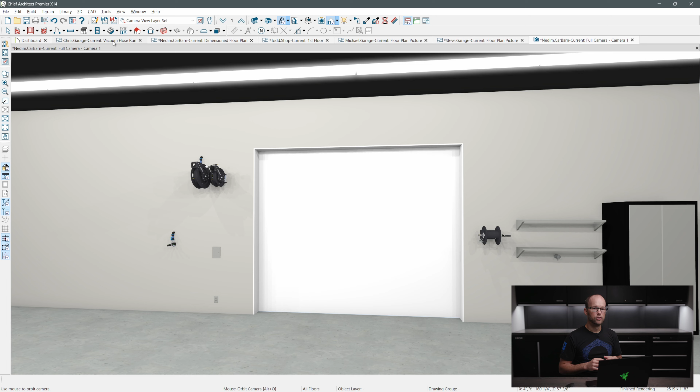So the first garage I'm going to show you is our client Chris. As you can see here, he's got a pretty large space, but we're really going with a pretty simple setup. Let me show you a 3D view here real quick to give you some idea and context.

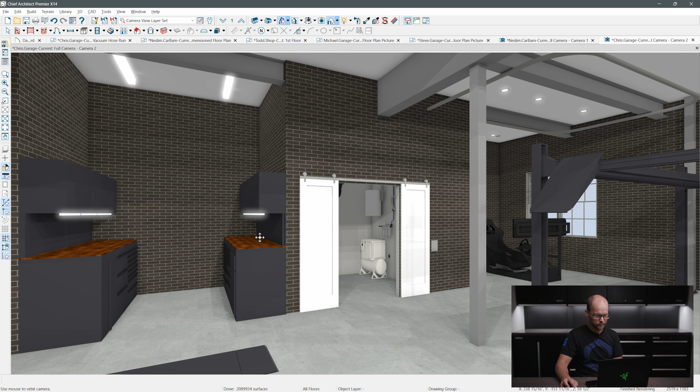We got some errors here, it's all right. We've got this room over here that is kind of like the mechanical room. We've got the Kränzle in there, we've got a FIAC New Silver 3/100 compressor, a sink, and some hose reels and stuff.

He really wanted to hide as much of the mechanical stuff behind the wall as possible, which of course means, hey, let's put the vacuum in there as well. He didn't want to do a hose reel for the vacuum though, since it was going to be hidden in that wall, and it's only 50 feet, so that constricts you a little on how far you can bring it out if he's got a car on the other side, plus it's more difficult pulling that size of hose through the doorway.

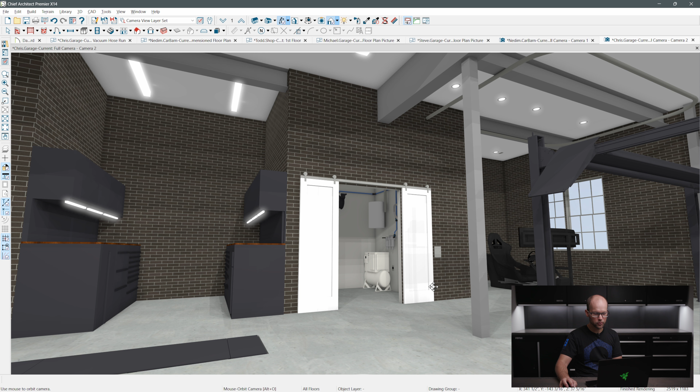So we wanted to do a really clean install with hide-a-hose. What we've done here is plan out the vacuum to be on this wall above the compressor. Power is up here on the left, and that can really be anywhere, but ideally I'd probably want to put the power just below over here, which you'll see in all of our other designs too, that the power is typically on the left bottom.

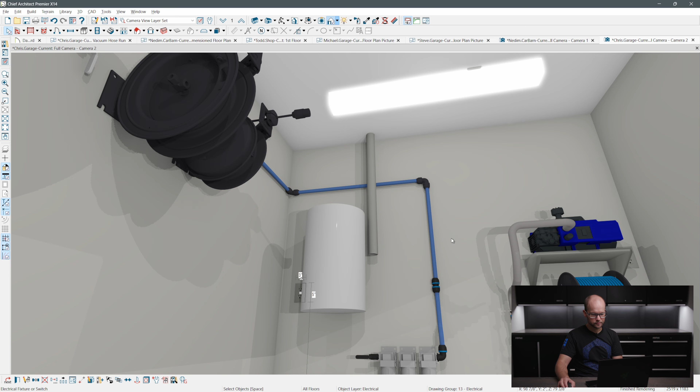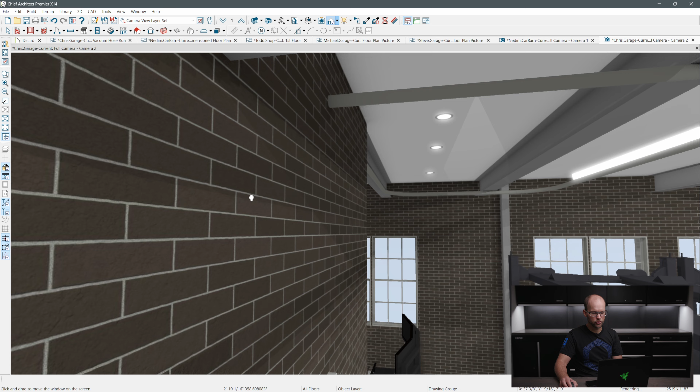We've got the piping that goes up into the ceiling, and there's a really nice long sweeping 90. For any of you doing a hide-a-hose situation like this, you want to do a long sweeping 90 anywhere you've got a turn. You can see where this comes up into the ceiling, there's an attic space here we haven't modeled out, and then it comes over into the main structure of the building. Because of the floor above and the I-beams, there really wasn't a good place to hide all of this piping to house that 50 feet of hose.

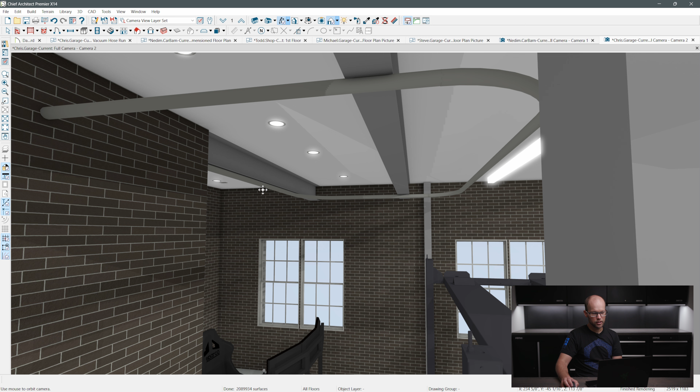He decided it would be best to just have it exposed. Now at the time of install they may do it a little differently than this, that's fine, but we at least planned out how much piping they're going to need, how many 90s they're going to need, and all of that. So you can see it come out this way, go just below the I-beams, and circle back into the wall here, with another 90 that comes down off of this to bring the piping down to this access panel.

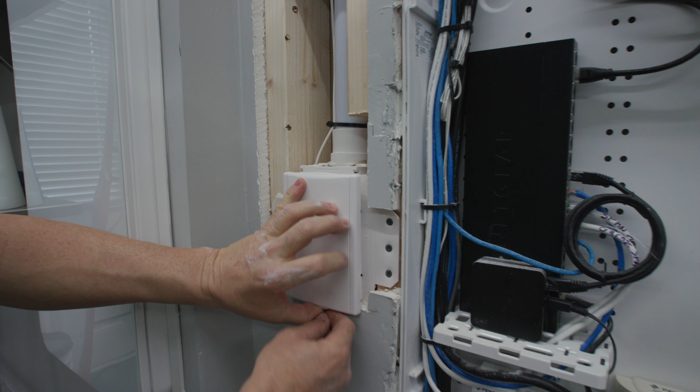So right next to the door is where we have this access panel, and this is going to work out to be a nice location for him. If you guys have never experienced the hide-a-hose function, it's incredible. It's so cool to be able to pull the hose out, lock it into place, turn on the machine right from that switch, and then when you're done, unlock it, plug the end of that hose, and it just sucks back up into the wall. It's the coolest thing. So this is Chris's setup.

It's pretty simple, but basically we're just planning out where this piping is going to go up, where it's going to 90 over, and then how it's going to make this loop. You have to figure out, based on where your vacuum is and where your outlet or access panel is, how to fit over 50 feet of pipe so that you can house the hose that goes in that.

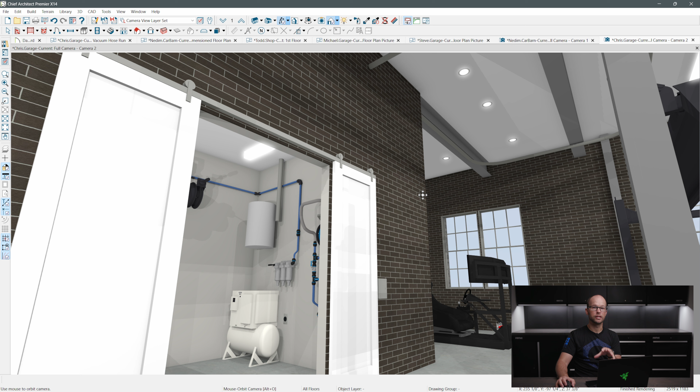So if you have your vacuum very close to the access point, you're going to have to go out and around, past all the piping, and then bring it back. That's what we did with Chris here, figuring out the piping situation around the ceiling and stuff. And like I said, at game time install, he may want to do it a little differently and maybe hide it more back in that corner, but we've at least figured out all the pieces and parts he needs, and given him an idea of what it could look like.

All right, next we're going to jump into Nedim's garage, and this is another hidden kind of install where we're doing hide-a-hose. However, this one's a little different in that we have multiple access points for the hide-a-hose install.

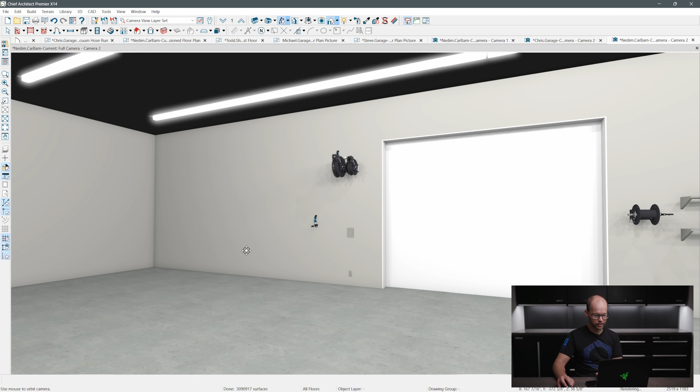So for Nedim, in this main large space where he's going to have some car lifts and a working area and be able to do some washing and stuff like that, we set up this kind of air station over here. This air on the wall is going to be for a future lift that he's going to install. So this made a really good, near-the-entrance but secluded type of location for the vacuum, or for one of the access panels.

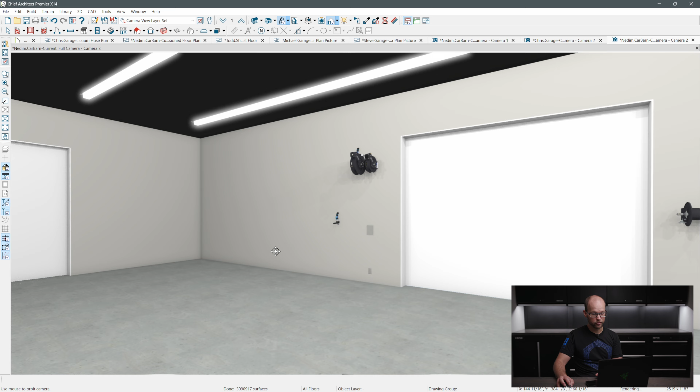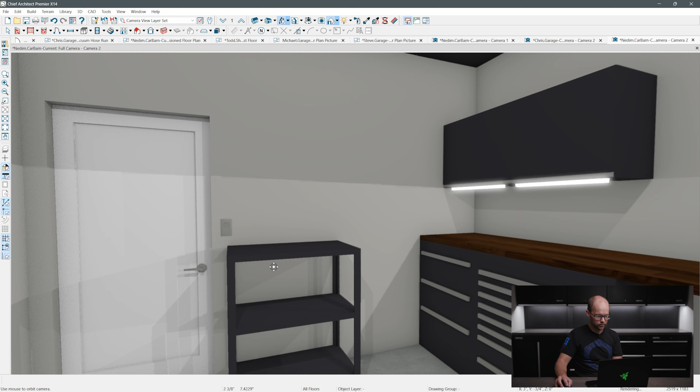Let's see, I know he's got some more in here. Yeah, we've got another one over on this side near the working lift, the recessed scissor lift. And then I believe over in this space here where we have the hidden cabinets, we've got another access panel. Yes, on this wall here, so that way he can vacuum in this room or clean up any parts or anything like that.

Let me close out some of these cameras here.

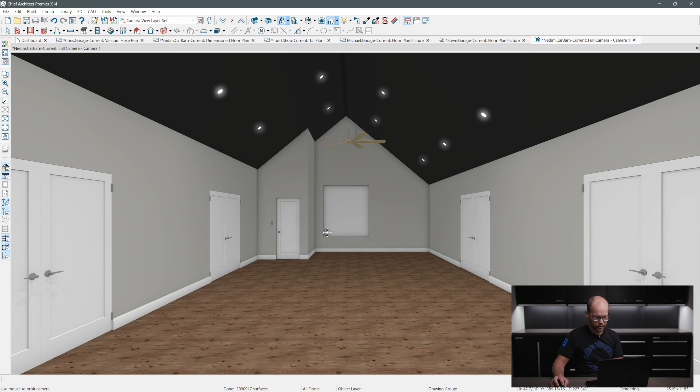And then upstairs, he has this really nice living area where we've incorporated the vacuum into this space as well. So we've got an access panel here on this wall, and this will be great for cleaning his floors and stuff like that. Just like a regular central vac system in a home is essentially what this is. It's what our solution is, but it works awesome for cars as well.

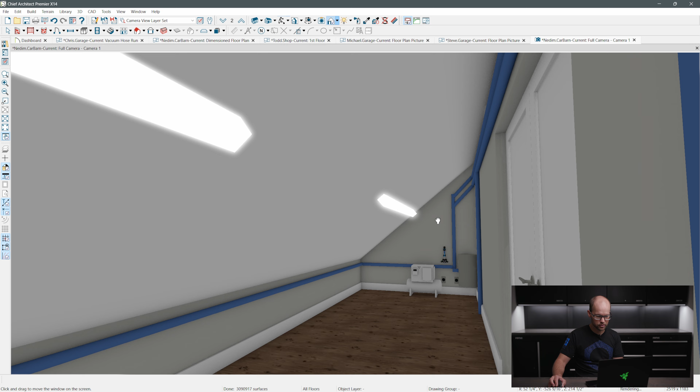All of the piping behind the scenes, though, is a little crazy because he's got so many different runs, so many different access points. It was pretty difficult for us to figure out where all the piping needs to go.

For us, if you're working with us in design, we're going to do what we can to figure out the piping, but a lot of times it's going to require you and your contractor or architect or engineer to really figure out exactly where all that piping needs to go. So just keep in mind that you have your vacuum location, you have your access panel location, and somehow you've got to get in as straight a line as possible with as few 90s as possible, at most 50 feet of PVC pipe running through the wall, ceiling, wherever, between those locations.

Whatever you've got to do to make that work because of the construction of your building is what you have to do. So we can design it and give you some idea through our software of what we think it should be like, but we don't always know exactly what your framing is going to be like, or what the flooring structure is going to be, or what kind of attic beams you have and stuff like that. So take it as a guideline and then work with your contractor or architect to really figure out exactly where we can actually put this pipe.

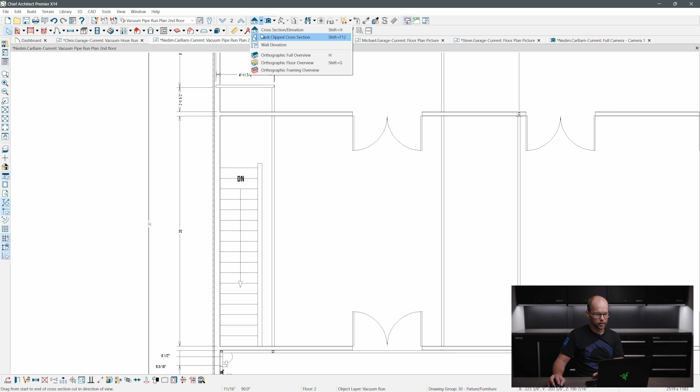We came up with a few different ways of viewing this for him. This one's a little more complicated, so I'm going to spend a little bit more time on it. Here's a more 3D aerial view to kind of show you how some of this is planned out, hopefully to give you an idea of what you need to think about what's going on behind the scenes.

This one is very complex because we have 4 outlet or inlet locations with the hide-a-hose panels. Yours might not be that expansive, and hopefully it'll be a little bit more simple, especially if you just have like a 2-car garage, or like at Matt's house right now, where he did a hide-a-hose installation, got his vacuum in the attic, and the piping coming down.

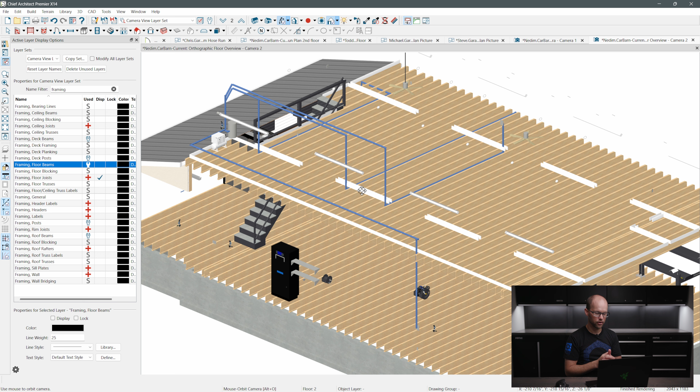The other thing to think about is if you're going to have multiple locations, you'll have to break those off and tee off from them very early in the piping run, because you can't just run one pipe all the way and then break off to 2 locations. Those 50-foot hoses are going to intersect and hit each other, and it's just not going to work.

So one thing to think about if you guys are going to be having more than 2 or 3 access points, or just really long runs. Say you have a really big detail shop or car storage facility, and you're going to have 100 to 150 feet of pipe to one location.

At that point, it probably does make sense to bump up to a higher power unit. Our machine now is fantastic for the power delivery it has, working on cars and vacuuming floors and stuff like that. But once you start doing a more complex system and doing more runs or longer runs,

you probably need to bump up to a 240 volt machine. That won't necessarily give you any extra power from an actual vacuuming or working standpoint, but it will mean that those longer runs and multiple locations are going to work better, more like the standard unit on a smaller system.

If you guys need to get something a little bit more custom, like Nedim, we can get you hooked up. We have availability to order whatever we need from Modern Day and get a power unit that's specific for your situation. It'll probably end up being pretty standardized, like, hey, for a 240 volt installation, this is the one you want.

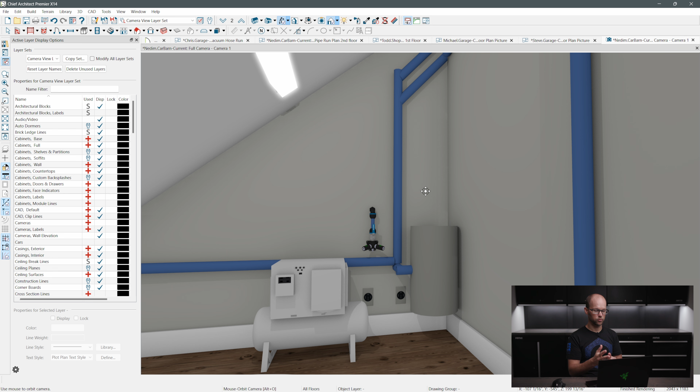All right, this next garage, you may have seen in the most recent design video where I went through our design process and showed you what we do in our software. This is Todd's garage, and we've included a vacuum in here.

If you have a keen eye, you'll notice I did modify the vacuum setup a little bit, because now that we've had more time to install in several different locations, we know better how you need to do it. You'll notice Matt originally had his vacuum installed with the canister down below and the hose reel up top, and that was just part of our testing.

That kind of seemed to make sense—you have your hose reel here, you keep the vacuum down nice and low. Well, it made it really hard to get the bag out when you needed to change it. And it was a pain in the butt to have to reach all the way down to turn on the machine and stuff like that.

So now we've learned that, okay, you can have the bottom of the machine as close to that hose reel as you want, as long as it's not touching and not going to be in the way. And that still allows you to have a good location for the hose reel itself.

You want your hose reel to be centered at about 42 to 44 inches, depending on how tall you are. Think about the ergonomics of your body—if you just stand straight and bring your elbows or arms up, wherever that 90-degree point is, that's where you want the center of your hose reel, because that gives you the good range of motion and the most leverage for reeling that hose back on.

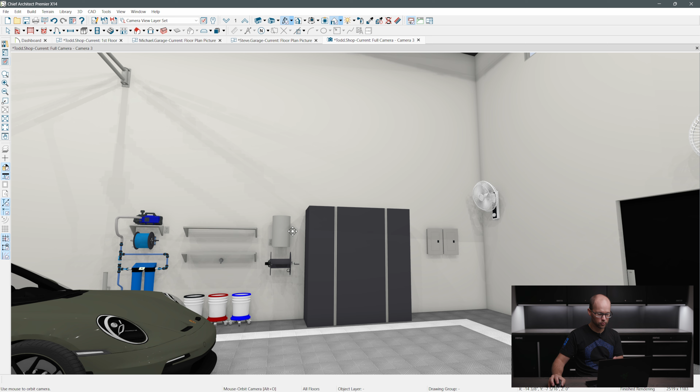And then you put your vacuum right above that. So just like we've designed here in Todd's garage, this vacuum is at 54 inches high.

And then we've got our power right next to the switch over here on the left. Not modeled in this would be the black piping that would go into the vacuum on the left side. If for some reason you were left-handed, you could flip that hose reel around and do your inlet piping over on the other side if you wanted to, which would be totally fine.

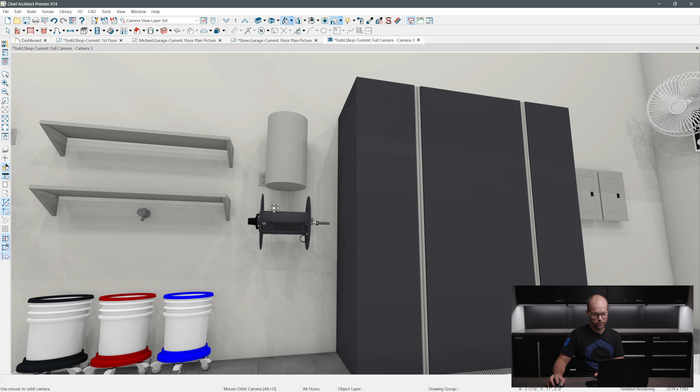But this is a good example of how we would do a simple hose reel setup, and this is kind of how you could incorporate it into your detailing wall. If you have a garage dedicated to that, or a wash bay, or a larger building, you want to have the custom install solution - shelving for your Pressol bottles, your bucket filler, the vacuum, and locker cabinets for your towels and chemical storage. This is a really good example of a functional, all-in-one detailing setup on a wall.

Let me give you an idea of what kind of space this takes up, including the wand holder. Let's grab our tape measure here, bring this down to about right there. So we're at basically 17.5 feet. And you could make that a little smaller or bigger, depending on what you wanted to do.

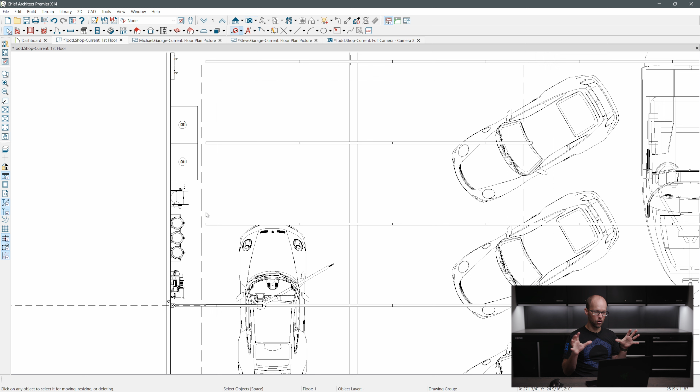But that would be a fantastic all-in-one detailing setup. Maybe eventually we'll sell that as a package or solution someday where you get custom install shelving, bucket filler package, vacuum solution with a hose reel, and a couple lockers for storing all your accessories and detailing chemicals and towels. That would be a sweet setup.

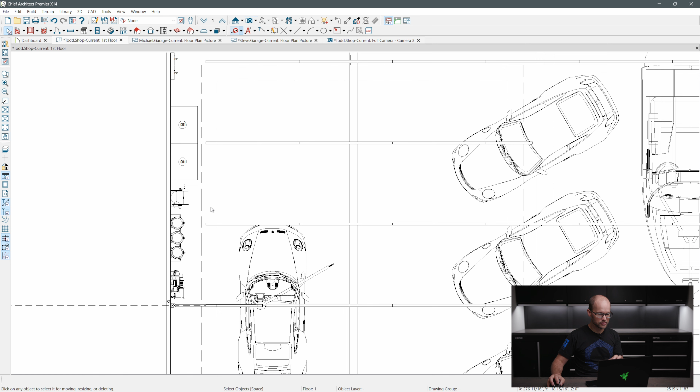So this is a great example of what you can do with just a simple vacuum solution and hose reel. Like I said, I don't have it modeled out to show just the vacuum by itself. If you were going to do that, you would just lower the vacuum.

You would want the height to be at that same kind of 44 inches or so for the height of the top of the vacuum. That way you can open it up. When it's a little bit higher like that, you probably need to get on a step stool or a little ladder to reach up, grab and pull the bag out, and reattach everything. But most of us have that type of thing in our garage anyway, so it's usually not too big of a deal.

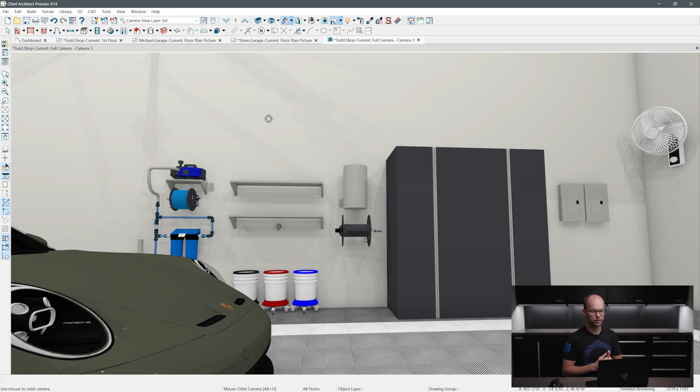If you're doing an install with a hide-a-hose, or no hose reel and you're just going to loop your hose on it or have it elsewhere, I think 44 inches is a really good number for how high the top of the vacuum should be. You're generally not going to have much below it anyway. But that'll be a really good spot for the best ergonomics - taking the lid off, reaching in, grabbing the bag, being able to see what you're doing, and clean out any larger debris that went in there.

All right, this next garage is Michael's, and he's been working with us to design this new garage for his house. It's very large, and he's even got another garage that's like his shop area where we put some lead rack and MSS Plus cabinets. But in here, this is mainly going to be parking, storage, and kind of the detailing area.

So we have the custom install on the wall - we've got 3 shelves on the wall for Pressol bottles. The bucket filler is actually over here on the left because of where his plumbing is and stuff. It just made it a little bit easier for him, and he wanted a separate spot for that. So rather than having the bucket filler under the shelving, we actually did the access panel for the vacuum, which gives it a nice and discreet location.

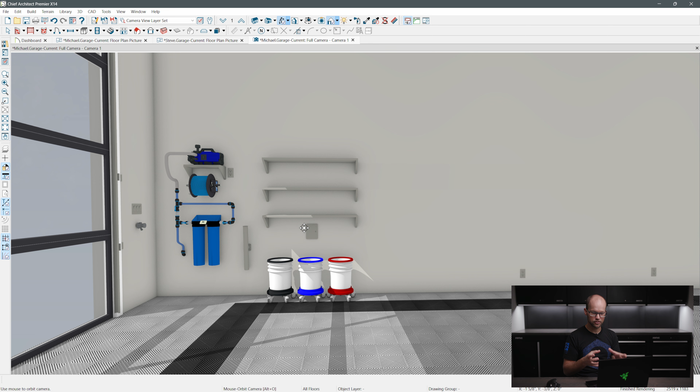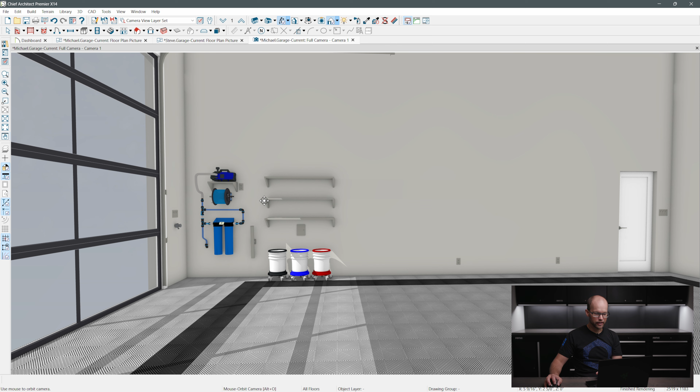And this one is a little different - the location for the canister of the vacuum is going to be up in the attic or over in the storage room that's elsewhere. But this is a really good example of how you can integrate it into your wash setup and have it below the shelving, or you could even do it next to the pressure washer over here if you wanted to.

In Michael's garage, we played around with putting it over on this side, but in the end we decided it made sense over here next to all the detailing stuff. This wasn't so much showing the install and piping, as much as giving you another idea on how to incorporate the hide-a-hose type of situation into your custom install.

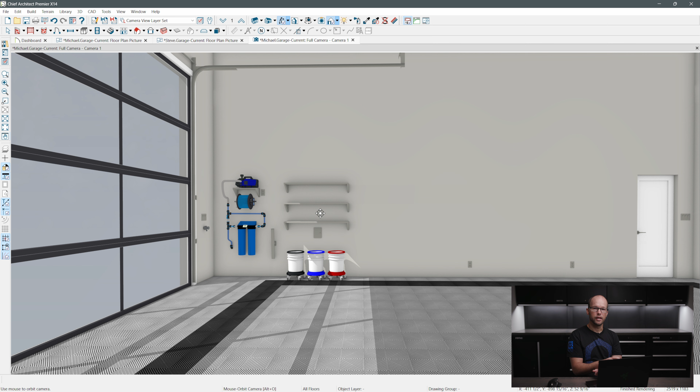And bucket filler and stuff like that. Another idea you can do, which we've done with previous garages, is if you wanted a hose reel and not the hide-a-hose for some reason—maybe you just like the look or the action of a hose reel—you could still have your vacuum elsewhere in another room and use that same PVC piping to the hose reel. Get rid of that bottom shelf and have the hose reel right there under the second shelf. Kind of a cool idea.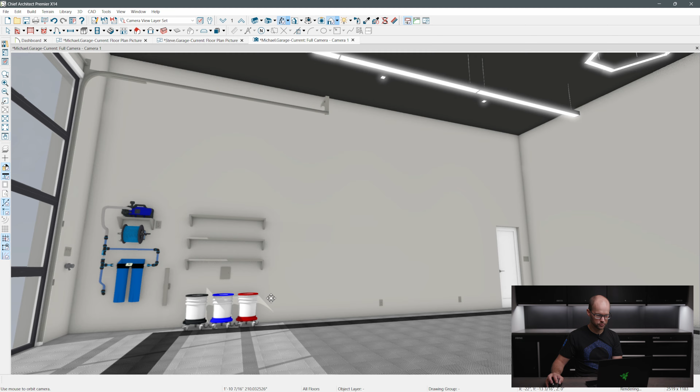But Michael's garage is really cool. If you were ever going to do hex lighting in a garage, this is how you do it. These are Utopia Cube Hex, I think is the product name—really high quality, really expensive, powder-coated steel enclosures with a light source as good as our Cree linear fixtures. If you want hex lighting but don't want the crap that's absolute crap that you see all over Instagram, don't do it. This is the OG solution. It's still a hex and Matt still hates it, but if you want to do it right, this is what you do.

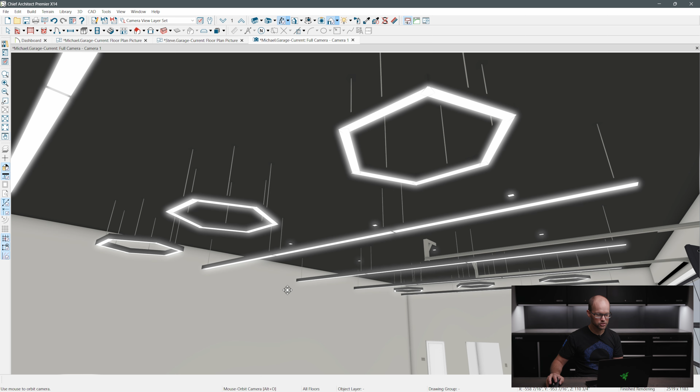I just wanted to show that to you because it's pretty cool, and I really like the way this garage has turned out. I'll have to check with Michael—I don't think he's installed this stuff yet. So we'll probably do some kind of before and after design walkthrough on that once we get to that point with him.

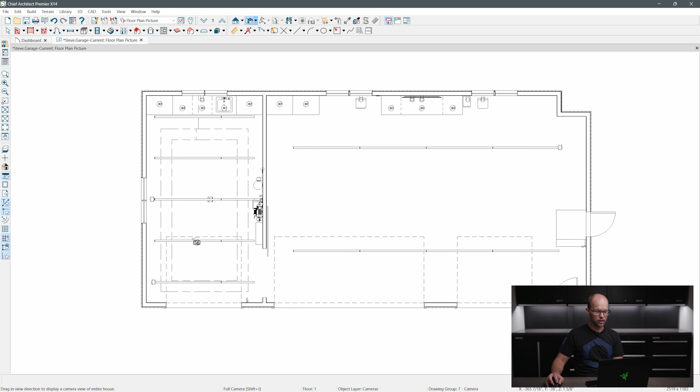All right, I've got one more garage to show you, and this is Steve's garage, where we've got a dedicated wash bay and then a more general garage—parking and storage area—in the other bay. Over here is where we have the vacuum setup. I think we put it at just about 44 inches, that's the number I was telling you before.

This one's a little different because you have the vacuum right here, exposed, in the room, so you could hook up another hose to it if you wanted, or if you had an issue servicing the hide-a-hose or whatever. I guess that would give you the flexibility to do that.

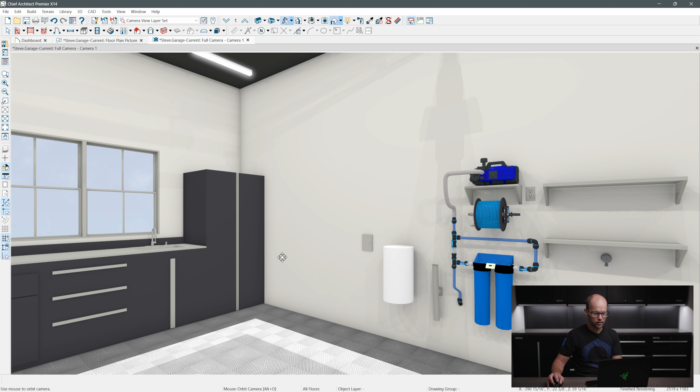But it provides very easy access, so you can turn on the machine right there, or change the bag out, without having to go into an attic or an extra storage room somewhere else. So that would be the benefit of having it here. Plus it's going to look really cool next to the pressure washer system and stuff like that.

One thing I didn't think about initially, that I'm seeing as I'm looking at this—because we have this kind of blank space up here—we could probably do another shelf, or maybe come up with some kind of storage solution for the accessories we have. Maybe some kind of upper cabinet, or I guess we could do like an MSS Plus upper cabinet. That might work pretty well.

We just have to make sure we're not blocking the top of this, because remember, you have to open that to get the bag out and change it. But this one's different because we have an exposed machine, with the hide-a-hose right next to it. What you need to think about is, if you have your canister here and your access panel for the hide-a-hose there, you've got 50 plus, probably closer to 60 feet of pipe that you need to put somewhere.

Think about that when you're planning your install if you're going to have everything next to each other like this. Your piping is going to have to go into the wall and either down into a basement or up into the attic, loop around so that you can make up that 50 feet, and then bring it back down to your access point with as few 90-degree turns as possible. If you're making a loop, obviously you're going to end up with four 90s there, plus your 90 up, so five, six 90s.

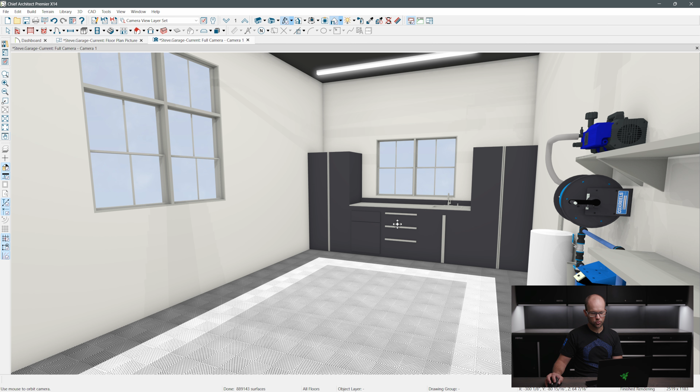But most of the work is going to be done in the wash bay over here, where we've got Swiss Trax. We've got some locker cabinets and a nice little detailing setup here with a waste bin, a sink, larger drawers for maybe polishers and stuff like that. More lighting in this space.

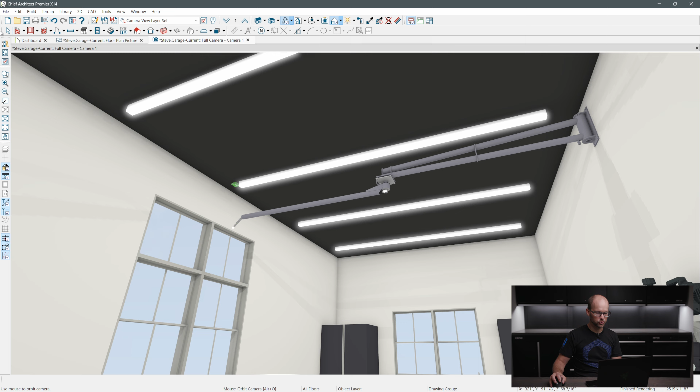I know you guys have heard me talk about it before, but if you work with us in design, seeing these images and seeing all this stuff in 3D is really uncanny, like how accurate it is to what it's going to look like in real life once you have it built.

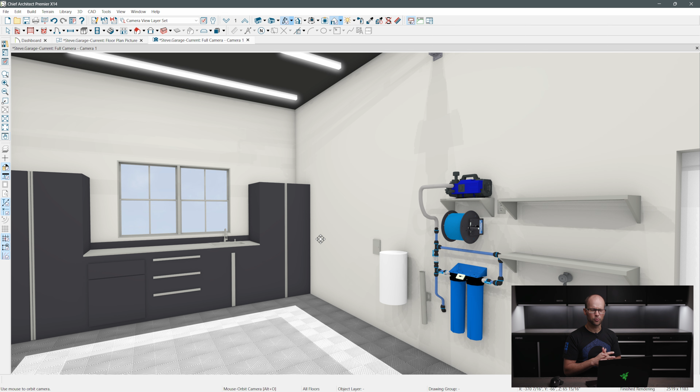So we'll be able to provide you with the wall elevations and stuff like that on the product page eventually. I don't think we have that up right now, but wall elevations on height and stuff like that for different versions of the install. And we'll be able to work with you in design too if you want to do something custom or figure out where your piping needs to go.